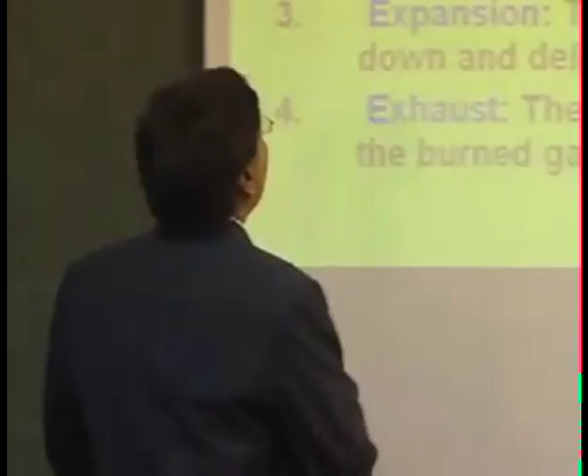Okay. Because we are not giving enough time for the combustion to complete and not getting the equilibrium in the process. But anyway, let's have a quick look at the four-stroke engines that are spark ignition engines. In fact, in India, I don't know how much you know, a policy decision has been taken that we will not produce any more two-stroke engines.

So I would like you to recall the two-stroke engines and four-stroke engines, and within that there are two kinds of engine: one is the spark ignition engine, and one is the compression engine, which can be ignited on its own. Okay. And when we talk about compression ignition internal engines, these are largely the trucks, the buses, the locomotives, the ships and all. Okay, but there are also some large engines which are compression engines but may also be two-stroke, but they are very, very few.

Apart from that, we should at least recall that there are four cycles, okay, four strokes: intake, compression, expansion, and exhaust. Okay. So don't read so much in here, because there's a little figure which we all will recall that's much better and easier to understand. So the first stroke is the intake.

So what you see on the top of this is the intake valve. Okay, the fuel is drawn in, and the piston is moving down. Okay, and this is the outlet or exhaust. You see that is closed here because there is a closing here. Okay. Once this is completely filled with air and fuel, then the compression starts.

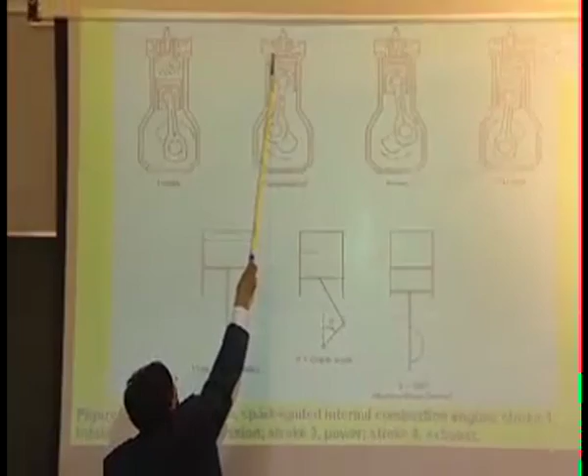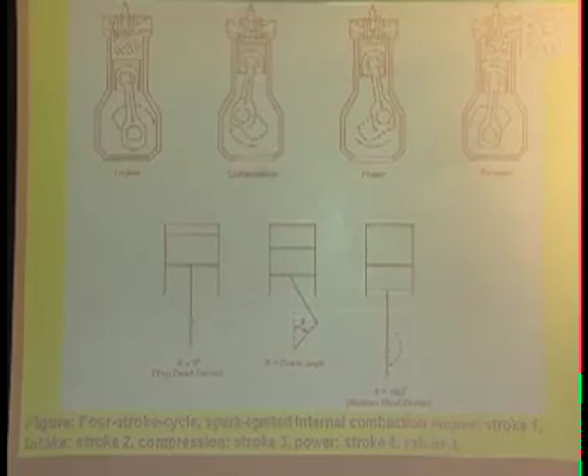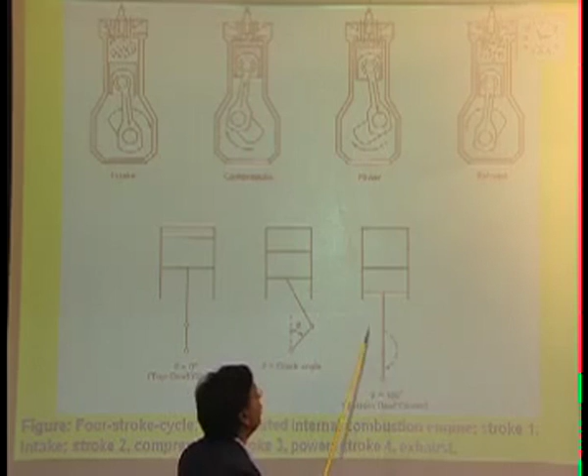So this time the piston is moving up, and both are closed. See here the intake is also closed, and the exhaust is also closed. The little line, you see that one here. Okay, so we get a compression stroke, and then there is a power or expansion stroke. In that case also, both the valves, inlet as well as outlet or exhaust, should be closed.

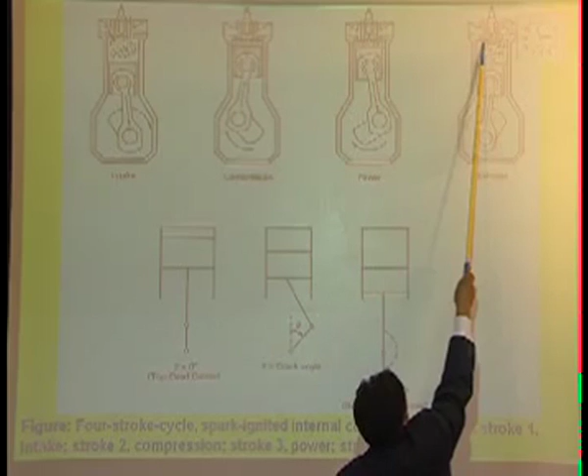So this is closed, and once you have the exhaust, inlet is closed, the exhaust should open and things move out from there. As a result, the cycle goes on, and we continue to get the power stroke. And you can also see this position where theta is 0; theta is the angle, called the crank angle, between the piston rod and the crank rod.

So when it is in this position, this is called top dead center, we all know that, and theta is 0. When it is at the bottom dead center, theta is equal to 180. Okay. In a two-stroke engine, there will be only two strokes, but most of the time now in India we're talking mostly about four-stroke engines. In fact, all scooters you see have been converted to four-stroke engines.

Okay, because we'll probably see in the lecture that four-stroke engines are cleaner than the two-stroke engine. Okay, in two-stroke you get the power very quickly; every second stroke you're getting the power. But compared to four-stroke, the kind of pickup that you had on the scooters that were two-stroke, Priya and all, was much more than the other scooters.

But the technology is changing very rapidly in this case. We don't want to be experts on this one, but still we want to understand a few things. This is the same thing that we described: the top dead center, the bottom dead center, and the crank angle. And sometimes the emissions also depend on the position where the piston is. So we'll pass this on to you, so you don't have to worry about this.

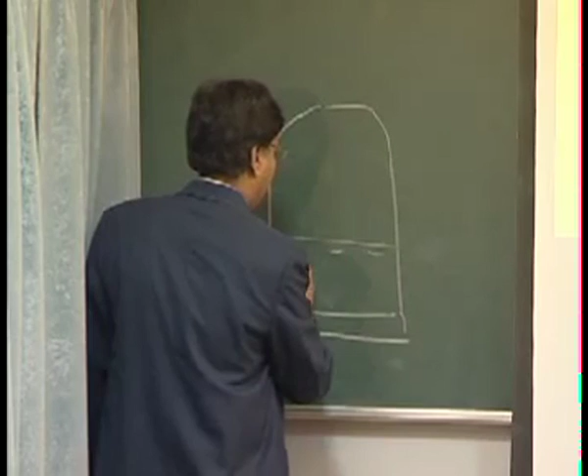In the LPG cylinder it is really liquid inside, and there is vapor above it, so it has a vapor pressure. What you're taking out is the vapor that constantly comes out, and this vapor you are burning. So the pressure is maintained by the liquid, and the pressure is always the same.

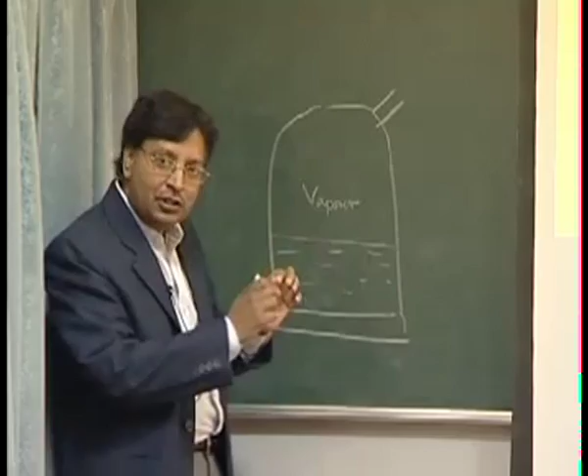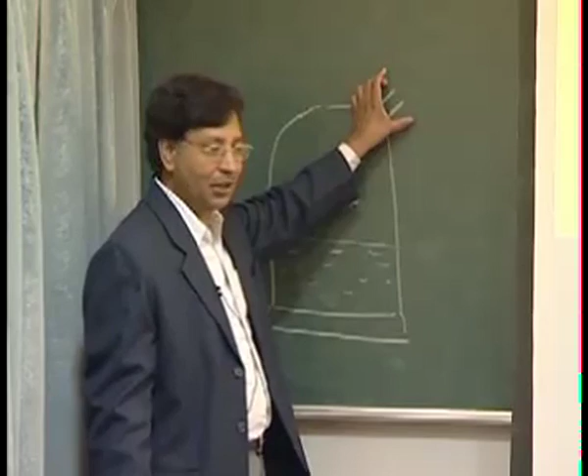So the problem with LPG in the household is you will never know when the cylinder is likely to be emptied unless you put it on a weighing scale. We all know housewives suddenly say, oh, the gas is finished. The gas is finished suddenly because the pressure is always maintained; it is not reduced as the liquid goes down, and then the liquid disappears suddenly.

And how did this very simple mechanism work? It takes the heat from the surrounding environment, and then this becomes vapor phase. That is what you need, the latent heat basically, it takes from the surrounding.

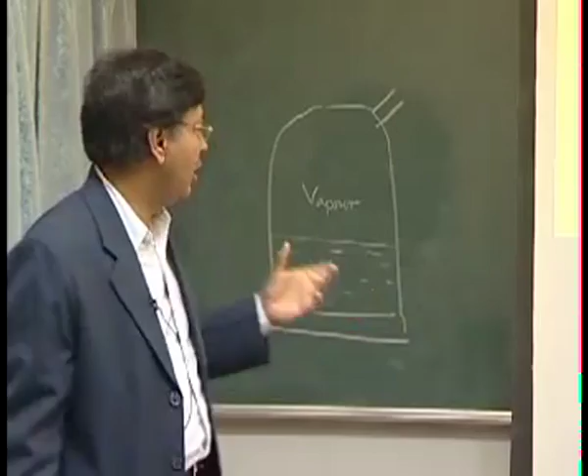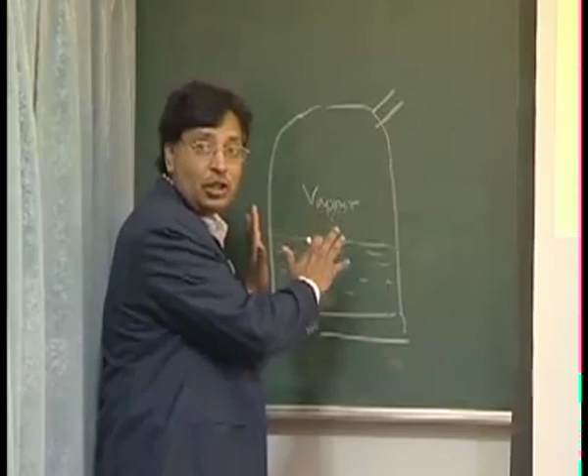Suppose you run into the problem, try this. Suppose your mother or your wife or whoever you are working with, the gas is finished. You might have observed these shopkeepers, like restaurant people, they will not keep it vertical. Of course, you should keep it vertical, but they'll put it upside down.

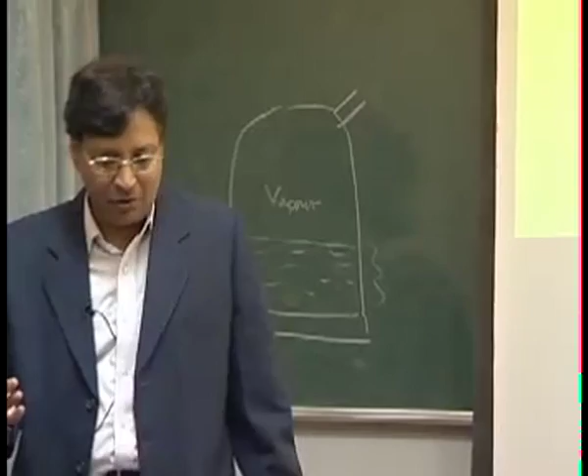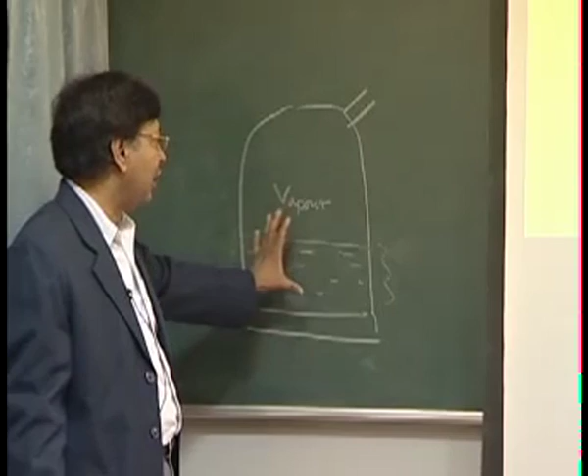In the winter especially, if you can put a little hot water onto this - not a very advisable thing, but in an emergency - you put hot water onto this one, lay it down, and put a little hot water, because hot water you can get from electricity or whatever. You put this in, you might still be able to reuse the remaining little liquid that you have, because that was not able to vaporize - you need a little heat in that area. You lay it down so that the pressure builds up on this side, and then this can vaporize, because this is a liquefied gas, and you can still use it.

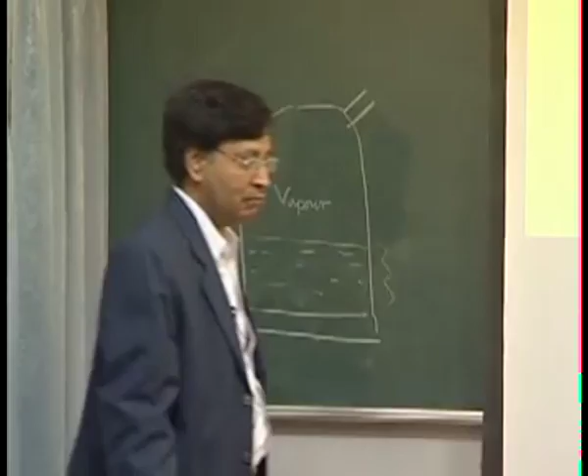So just, or even some people wrap the cylinder in clothes or put a little hot water and things like that, and then your LPG thing will work a little bit longer than what it ordinarily would.

But now people have ways that they can directly, even from the petrol pump, fill propane into their vehicle and things like that.

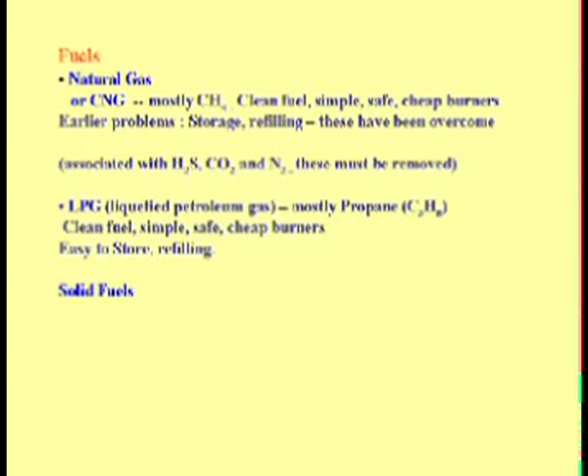Of course, for the other stationary combustion, people do use this one easily. Let's also talk about the solid fuels.

There are coals which may have sulfur content as high as 4%. There are coals from certain seams which may have ash content, especially bituminous coal, as high as 50%. But we still burn them because we need the energy.

So the coal will have many things other than carbon and hydrogen which can burn. Solid fuels will give you lots of emissions of ash, lots of emissions of oxides of nitrogen, and also lots of emissions of sulfur dioxide. So here what you need to see is the carbon, hydrogen, oxygen, nitrogen and sulfur.

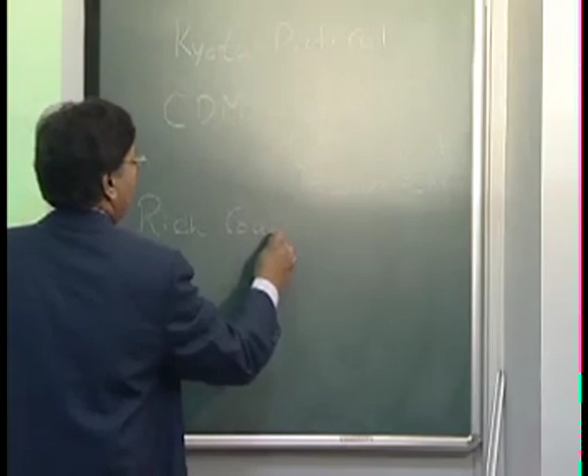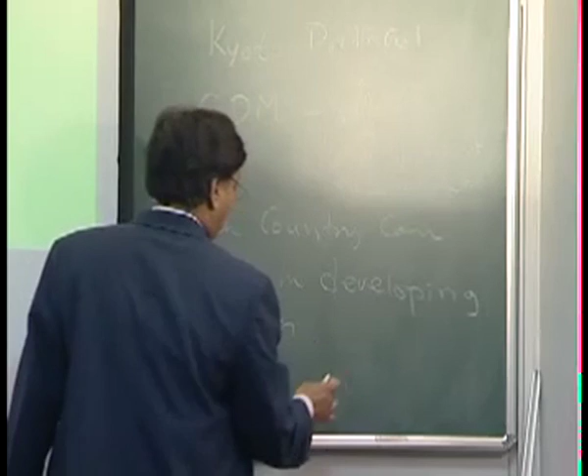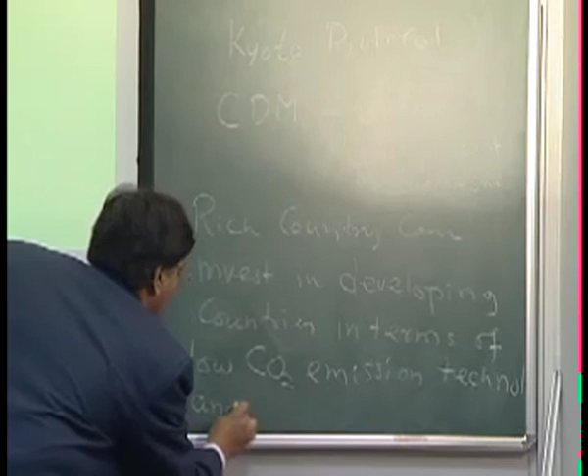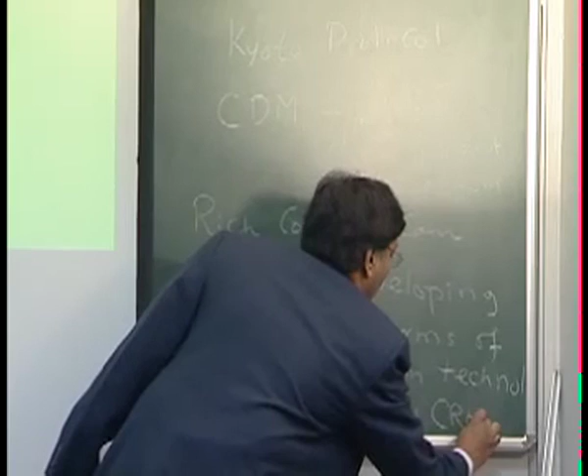One of the techniques is the CDM. In this case, rich countries can invest in developing countries in terms of low CO2 emission technology, and get carbon credit.

The idea is, suppose I have mostly anthracite coal and I'm going to burn most of it. I'm a developing country, I have no choice, I still have to develop. So suppose another country comes forward and says, don't burn this, we'll supply you with better coal that has low carbon. Then the CO2 emission will reduce, but that reduction will go as a credit to the other country. That's called CDM.

So there's a mechanism where, since CO2 is a global issue, wherever you can control it, that's to the advantage. That's what I wanted to tell you about fuel and things like that.

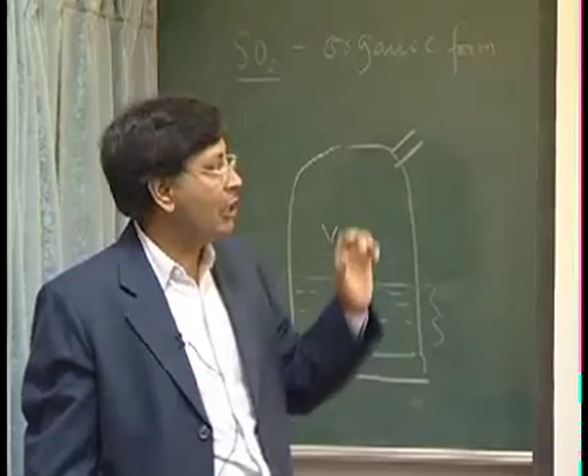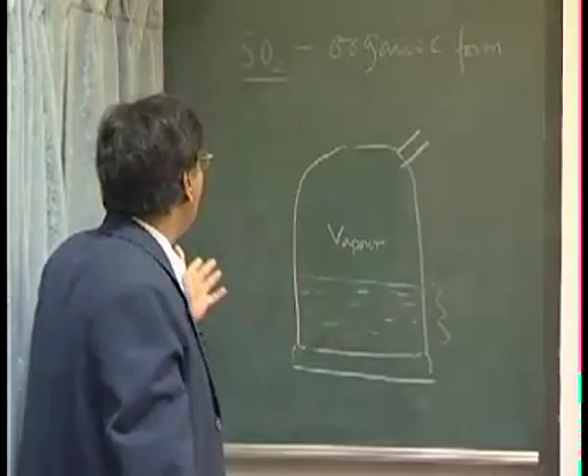Let me also tell you that the SO2 issue, sulfur largely is in organic form, and it can burn even before the carbon burns. So the moment you fire, you might not burn all the carbon, and carbon may appear in your ash, but sulfur will never appear in the ash, because sulfur quickly takes off and burns. That's very important to understand, because sometimes people say sulfur will be in the ash or some sulfur will not burn, but that's not correct.

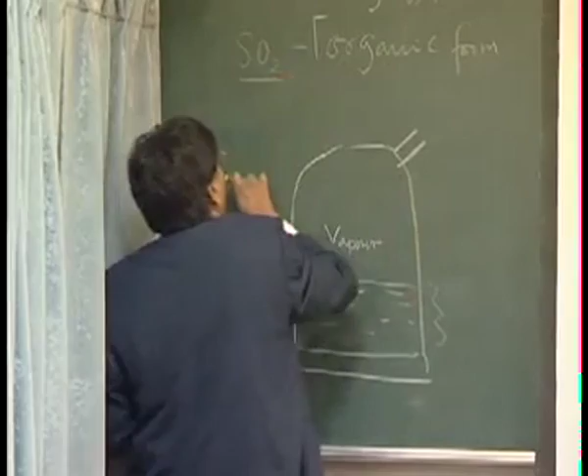So one of the first things to burn is SO2. You should have an idea of the fuels: what is peat, what is lignite, what is wood, and things like that.

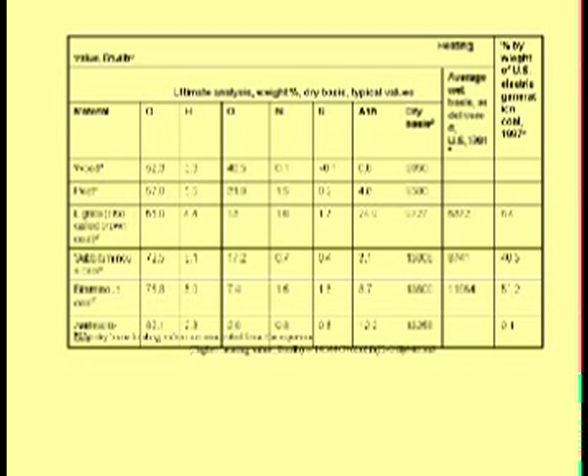The wood has very low ash content. But then again, the energy per ton of coal is more here. It's a bit higher compared to what we burn in India, because in India the ash content will be very, very high.

Are we burning lignite somewhere in India? Yes, the Neyveli Lignite Corporation has a huge power plant based on lignite, and they have other uses for lignite as well.

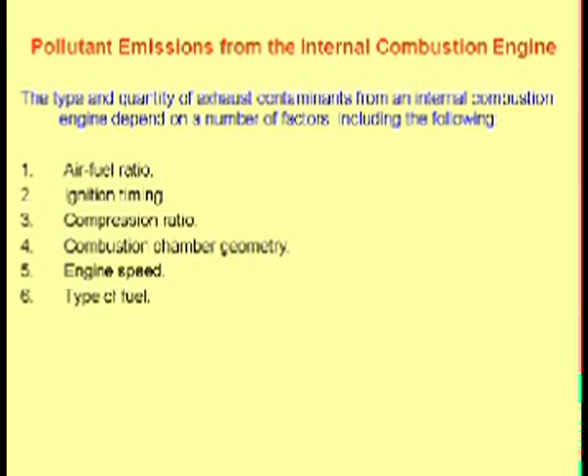Still talking about engines and such, the emission depends on the air-fuel ratio, which we'll examine in detail, ignition timing, compression ratio, combustion chamber geometry, engine speed, and type of fuel. That's where pollutant emission depends on internal combustion. Some of this we'll see and some we won't, depending on how far we want to go.

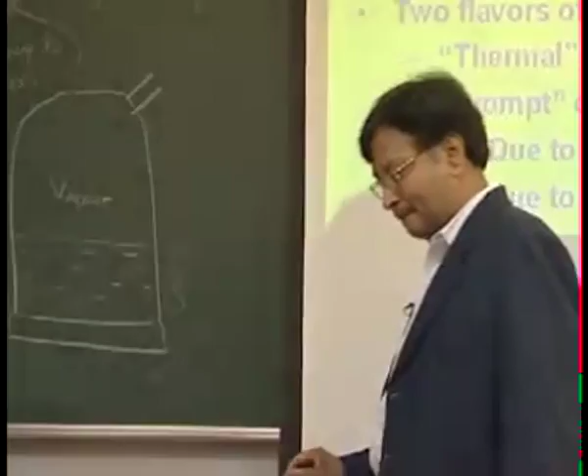Let's see how it happens. Let's talk about nitrogen oxide, a very serious issue. Let me also define phi, the equivalence ratio, which we defined last time: fuel-air ratio actual divided by fuel-air ratio stoichiometric.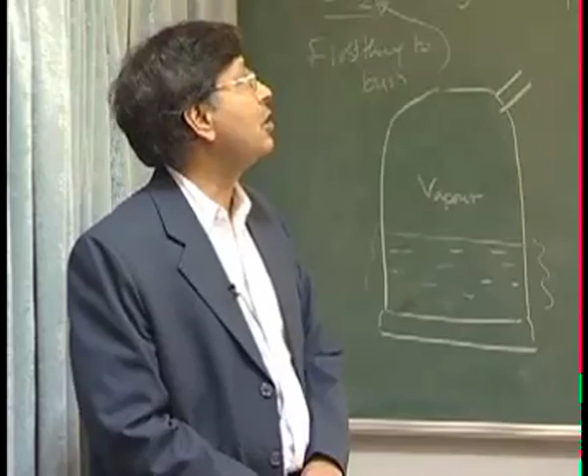So is that the same thing, the equivalence ratio? Now quickly tell me, if the equivalence ratio is less than 1, am I on the leaner side or the richer side? Leaner side, okay. If that's the case, let's look at this one.

So we have defined phi. Now when people look at the actual data and try to reason this out, when is the peak NO? Because NO is only formed...

This happens when it's slightly on the lean side of stoichiometry, when phi is close to 0.9. If it's on the leaner side, you see the NO peak is not exactly at stoichiometry, but somewhere here, because of the oxygen surplus.

We can continue - since we're talking about excess oxygen, it doesn't necessarily mean NO levels will continue to rise as you increase it. Why? Because you also need certain temperatures. NO formation is very sensitive to temperature, because it needs high activation energy.

So as you go too far to the leaner side, since you're not supplying enough fuel, the temperature will drop. When temperature drops, NO will not form, although you may have lots of oxygen, because moving to this side gives you more and more excess oxygen. But there are two combinations required: you need the excess air, but also the high temperature, as we discussed.

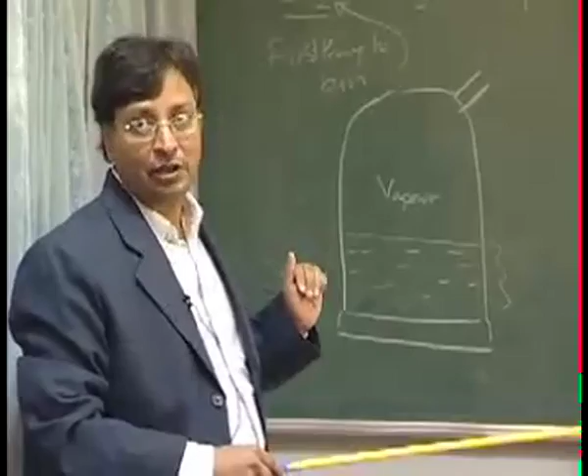So when you want to manage these things, you can either control the oxygen or control the temperature. We'll see that maybe today or in the next class.

Now there's a terminology here, very quickly - you see 'prompt NO.' We'll look at that in a moment. Prompt NO is the NO which is formed first, before you can think of anything else happening. This method with thermal NO was devised by Zeldovich, so that's sometimes called Zeldovich NO. Prompt NO was identified by Fenimore.

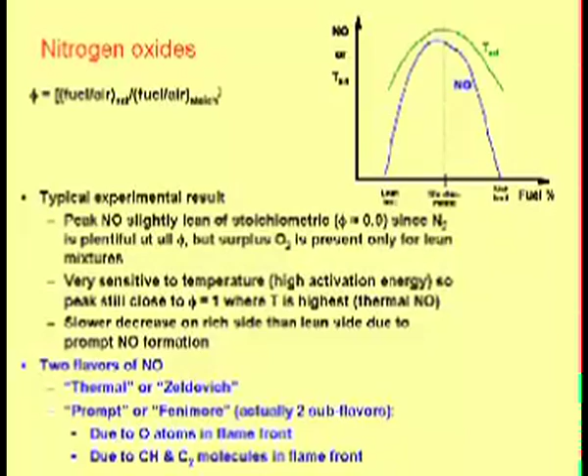It could be due to oxygen atoms in the flame front, or due to carbon and hydrocarbons and C2 molecules in the flame front. So before even the nitrogen and oxygen of the atmosphere can react, this can occur - even hydrocarbons can react to some extent with nitrogen and produce nitrogen oxide. Earlier we were just talking about N and O, but here that is one route.

So the one route is, if you have the O, this can be quickly formed because the activation energy requirement for this is... this is the slow process - activation requirement is high. But if it can react with this, it can form NO, and this reaction is much faster.

Zeldovich NO occurs in the burnt gases, because once excess everything has happened - this reaction of O plus N2 is slow - it occurs in the burnt gases downstream of the flame front, not in the flame front itself. But this doesn't tell the whole story, because something else occurs right in the flame. Experiments show that some NO forms inside the flame - that is called prompt NO, and it may not depend on temperature or on nitrogen in the fuel.

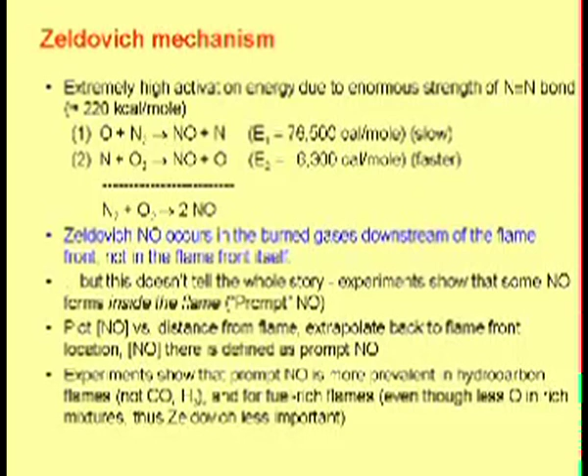We'll show you a plot of NO versus distance from the flame, extrapolated back to the flame front location to define this. Experiments show that prompt NO is more prevalent in hydrocarbon flames, and for fuel-rich flames - even though there's less oxygen in a rich fuel mixture. In this situation, for prompt NO, temperature isn't very important, but the reactions that may occur are.

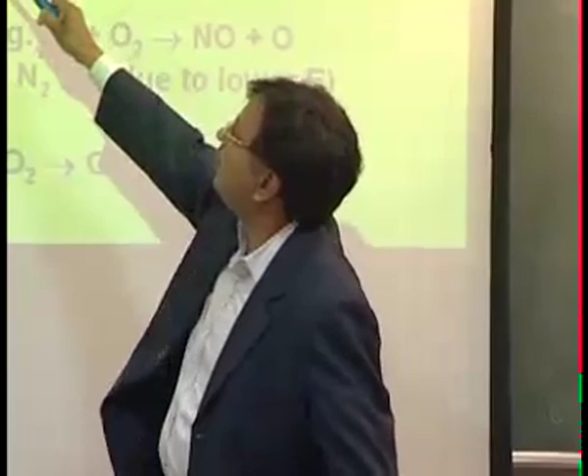When people plotted this, they found there was a quick NO level that then stabilized - that was more due to thermal NO as we moved away from the flame. So the point I'm trying to make is that for this formation, it doesn't even need excess air or not - that oxygen which you're supplying even for combustion, a small part of it might just be taken by the nitrogen there.

And how it happens is that you have some hydrocarbons - there are two possible routes, and people are still discussing how it happens - that this hydrocarbon can react with nitrogen along with the air, and it can make atomic nitrogen. This atomic nitrogen can then react with oxygen - and recall from the last slide, was this reaction faster or slower?

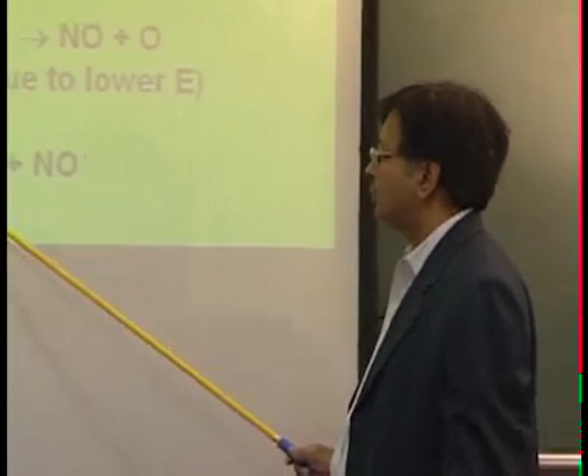Faster. Much faster. Okay, so this reaction can happen and you can get some NO, because this is much faster than the route from N2 plus O. Or some people also say that some carbon may be available for the nitrogen to form CN, followed by CN reacting with the oxygen to give CO and NO. So this also can happen.

So you can see, although you may have lots of oxygen, you may still produce CO in that process. But the most likely process is this one, that you get the prompt NOx. There's not much you can do about the prompt NOx, because this happens right in the flame. People are looking at ways and means to control the prompt NO, but again it is not a very significant amount. It could be as low as 2%, 3%, 4%,

that sort of thing. So the new thing that you learned is the prompt NO, and that is formed because of the reaction between the hydrocarbon and nitrogen before the hydrocarbon can be taken up by the oxygen. That may produce atomic nitrogen, and that can very quickly react with the oxygen before this oxygen can even take on to hydrocarbons. So that's what is called the prompt NO.

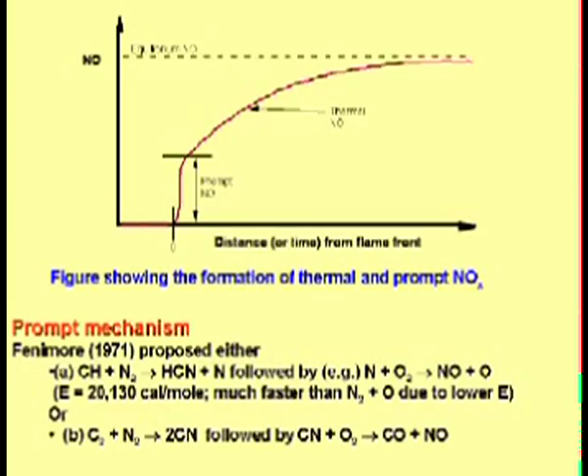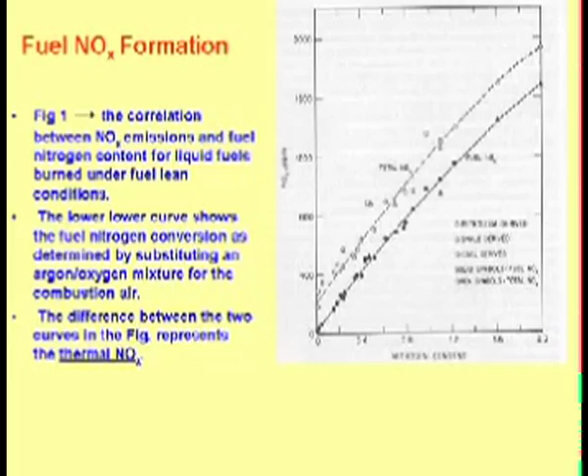thermal NOx. And that is what you can probably control or try to minimize, as opposed to the NOx that may come from the fuel. You can also see this is somewhat higher than the coal you see here. The corresponding value should be somewhere here, because they all have one-to-one correspondence. And then you see the coal. Coal is in fact a very significant source of oxides of nitrogen. So this gives you an idea of how people could figure out which part was which NOx.

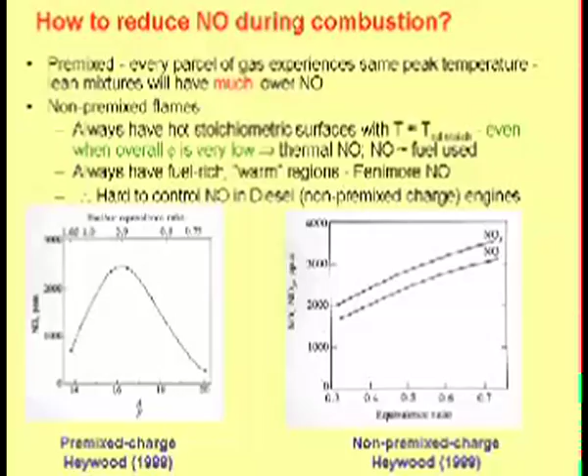Let's talk about the unburnt hydrocarbons. We are not talking about the control, we will talk control in the next class. In the engine, emissions of the unburnt hydrocarbon come from the raw unburnt fuel, because some fuel can escape unburnt, and fuel that did not burn all the way to CO2 and H2O. Some might just escape as such. Some might be converted into something else but stay as hydrocarbon and did not burn.

Because you start with some hydrocarbon, then there is the intermediate oxidation of the fuel that can take place. So you started with, let's say, methane. Some may burn directly and some may convert into something else. Some might just go as unburnt, and you may find this could not burn in the process and was never in there, but this might also be seen at the exhaust. So that is the difference between raw unburnt and fuel that did not burn all the way to CO2 and water. Lubricating oil is a serious problem.

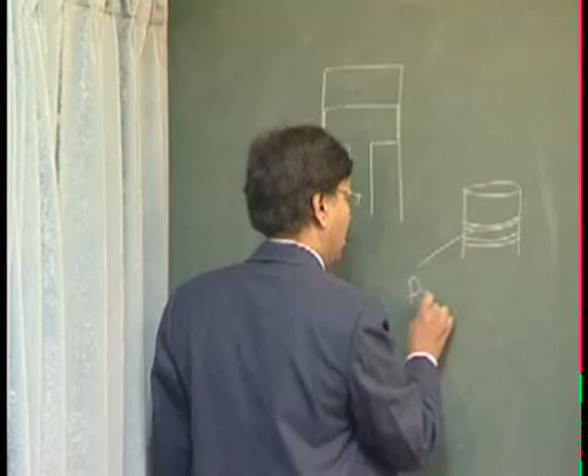What is the role of piston rings? To keep it tight. They are a little flexible, they can press, and then they expand themselves so that it becomes a little fixed. Okay, what happens when you have the piston rings here?

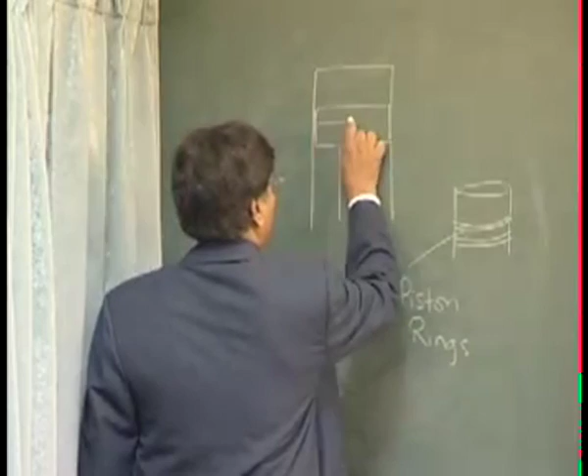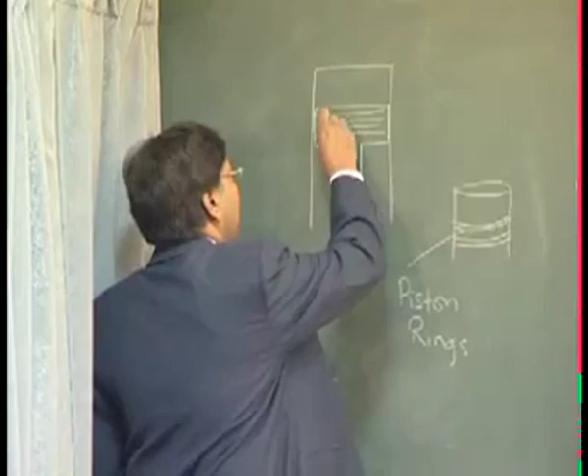As the engine gets old, there is wear and tear of everything. Of course, there are two metal parts hitting each other all the time. So this thing is worn out, and the piston rings are also worn out. So as a result, when you have the expansion stroke or power stroke, there is huge pressure here.

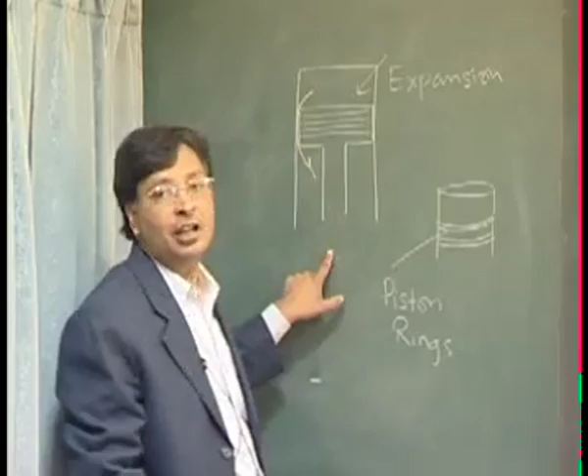Because this pressure is very high here and because of the wear and tear, this hydrocarbon, even before it burns or partially burned, can come out from the space here into the crankcase. This can also come from the side. And obviously once this comes out, there is no way that you can burn it. So this is called the crankcase emissions, or more popularly known as

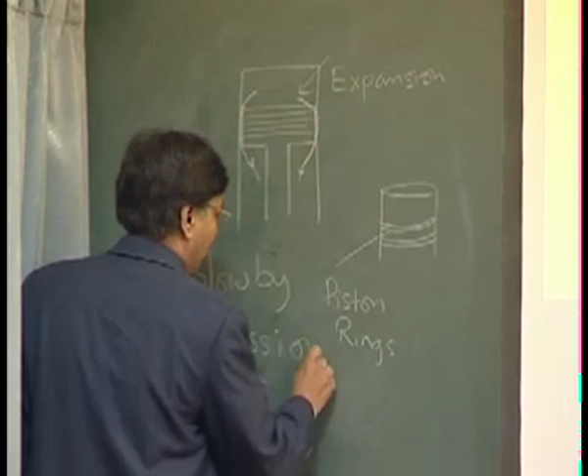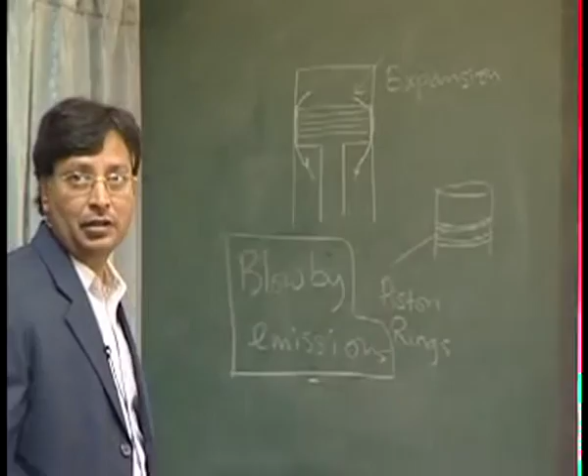blow-by emissions. Combustion engineers or IC engine people will be experts on everything, but we need to know at the air pollution level what these emissions are and why the crankcase emissions can be of huge significance. Maybe we'll talk about the control in the next class, but most of the control they do is that the blow-by emissions are recaptured and recycled in the car itself.

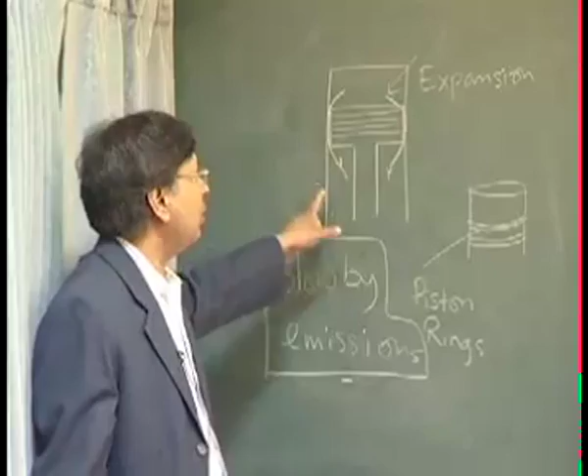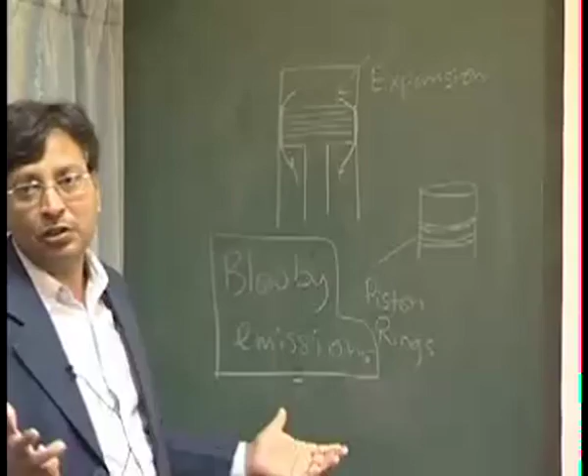But at least now you know this is what we are referring to: the crankcase fumes, older engines without crankcase gas recycling. If you can recycle these emissions back in there, you are more or less handling the situation. But if you don't, then these emissions used to occur. So therefore for the old engine, you must get the engine done well; maintenance is very important.

And sometimes the old engines can go so bad that there's a government regulation that engines more than 15 years old should go out of business, because these emissions can become very significant. And these will be all hydrocarbon emissions. You can also see the fuel tank emission. Maybe we'll talk a little later about the fuel tank.

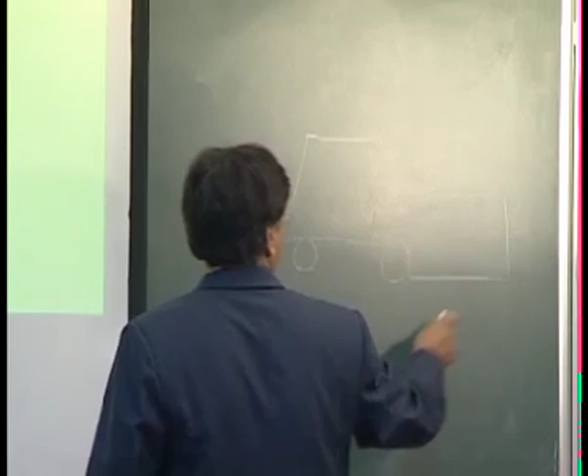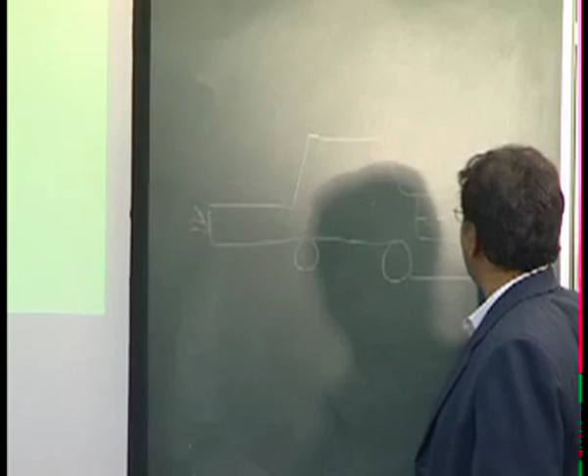If you have the car, well, I don't know how good or bad the car looks. Let's say this is the front. You have the light on this side, and then you have the fuel tank here. When you fill it, the petrol is up to here. As you are filling, the pressure here builds up, and then there are leakages from here. So this is called the evaporation losses in the tank.

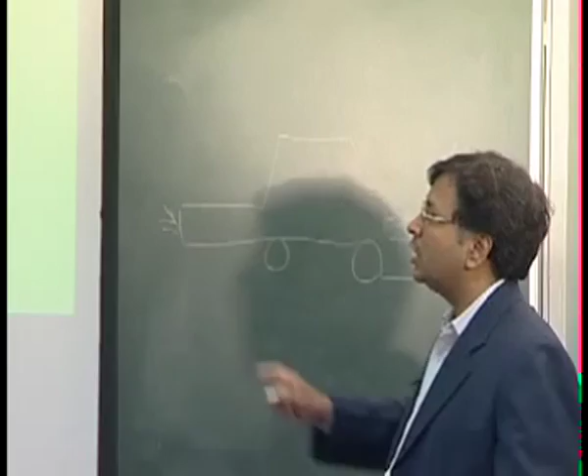And this can occur all the time. It's not only when you are filling it up; that time it is more because you have opened it, and that is when the emissions are more. But this occurs all the time. There will be some leakages, and even if there are no leakages, in a petrol vehicle the fuel is pumped through the fuel pump and taken to the carburetor. Of course, new technologies have changed, but the old ones have a carburetor.

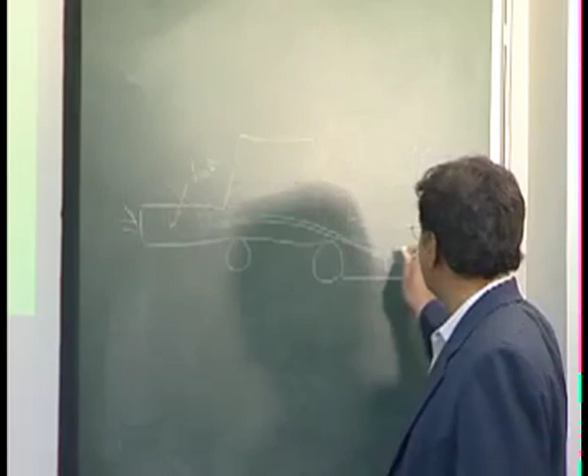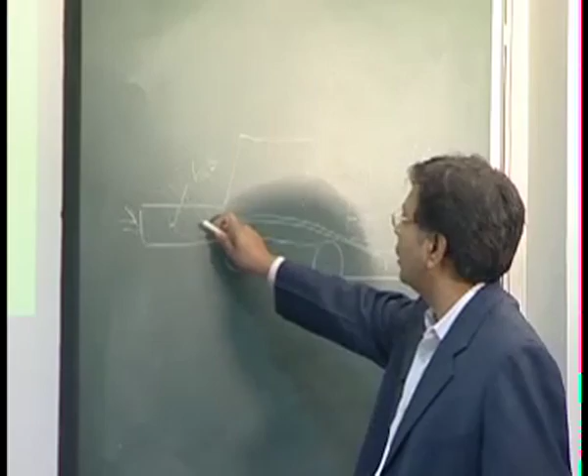So some people used to say, with the earlier scooter, the moment you get off the scooter, switch this off, so that at least this doesn't go anywhere. But now, probably we'll see in the next class, they are able to recapture these vapors and put them back in there, so that you can completely recycle. We'll probably see a line diagram, because you should have an idea what the latest thing people are doing is.

And I don't know if you notice this, that as you are driving, your car is showing the empty kind of thing.

Okay, and then we're all right. You stopped somewhere for half an hour, 1 hour, and this thing slightly going back, as if you have more petrol in your car. Okay, this is all captured by your evaporation system.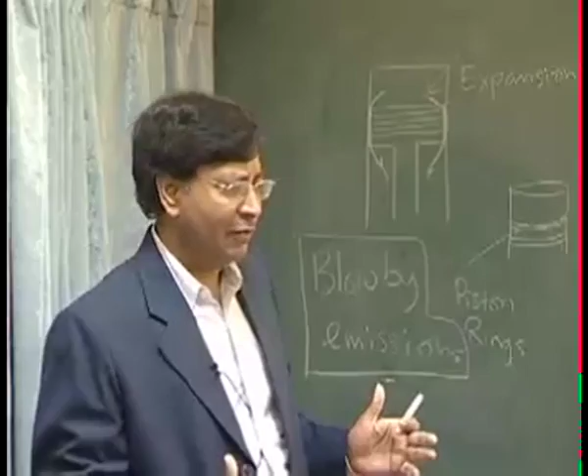It is very complicated. The amount of research and development that has gone in the car, I think there's no other machine where the changes of the technology have so many efforts, from the comfort to the combustion to the air conditioning and to the heating, and the adjustment of the seats. Sometimes in the seat there are 4 or 5 motors so you can adjust your back, everything you can do there. So everything is there.

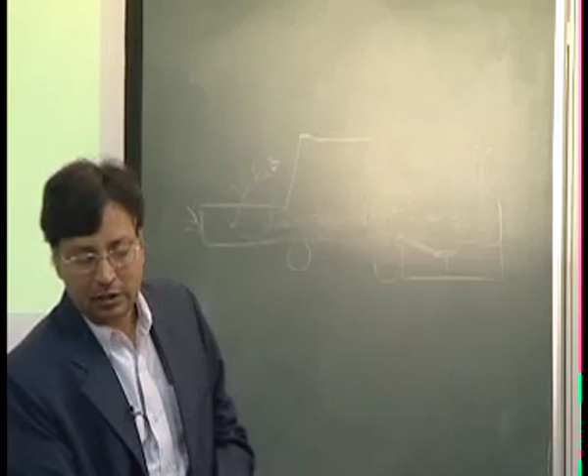So otherwise, if these things weren't there, they would also have very significant emissions. And filling stations, of course, sometimes have to have a system that can capture emissions at the filling stations. So you see the sources of hydrocarbon. Okay, all right. Well, we will do this one.

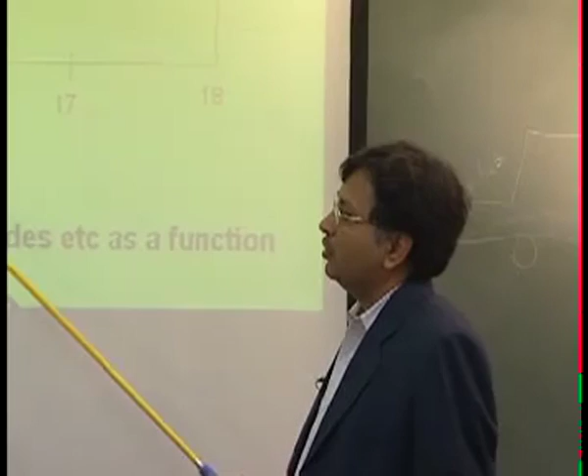And you really need to put some attention here because this is a very interesting and useful figure. What I'm doing is running the engine and seeing what is happening in the exhaust for the different conditions of the air to fuel ratio, and looking at the 3 important things: carbon monoxide, hydrocarbon and NOx, and their concentrations can look very, very different.

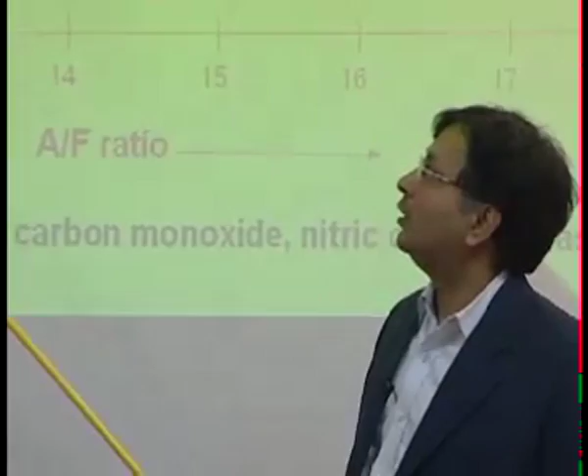And be careful about the units. CO is in percentage, hydrocarbon is in ppm, it can even be more, and the NOx is again in ppm. So let's see. Thanks to Bara, he has put this animation into this one. So for example, our stoichiometry is here. I put my engine on, and then you see the CO.

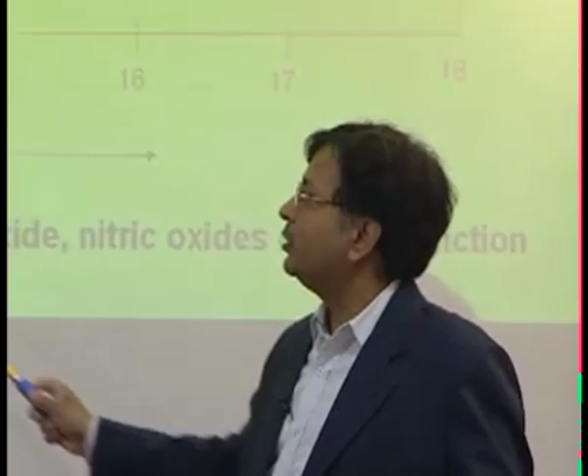So in this region I'm not putting enough oxygen. I'll have lots of CO, which can be of the order of 5% or so. We have measured CO; sometimes we have found CO in an old Ambassador car of the 70s up to 8%. And as you supply more and more oxygen, almost up to stoichiometry, you see the emissions are going down. Fair enough, simple thing, but the CO emissions will reduce depending on where you are.

Look at the hydrocarbon. Now we are in measurements of ppm. Again, you are putting more and more air. Hydrocarbon is reducing because you are able to burn more and more hydrocarbon, but it does not really go very low like CO, because, as we said, it can vaporize before it can burn, something like blow by, so the emissions continue to happen. It may reduce to a minimum at this point, but it doesn't go so low. And then there's a little tendency here that it may go up. Why?

Because now there's not enough fuel, it's not able to burn, so chances of unburned fuel escaping become larger and larger, because you don't have enough to burn. In fact, if you go so high, above 20 or so, you may not even be able to fire, because you have made your mixture very, very lean. If you have made it very lean, then hydrocarbon might just escape, because you are not even able to burn.

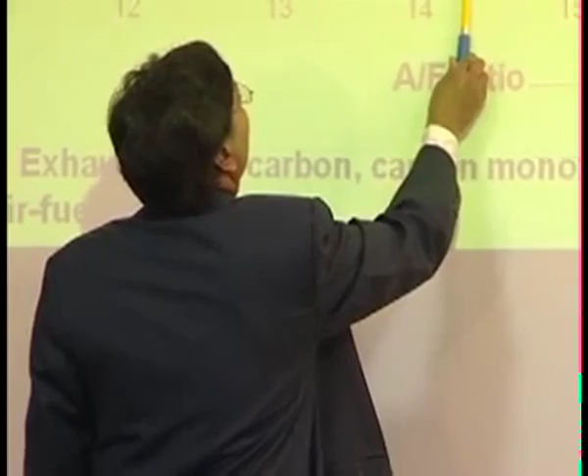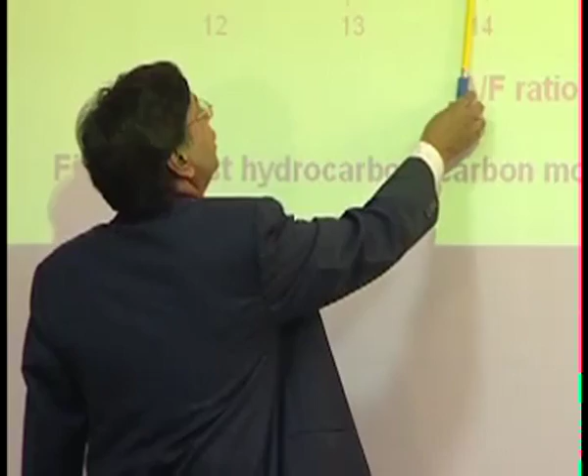Before we go to the next slide, normally my petrol vehicles operate somewhere close to here. It means I'm really supplying less oxygen, because you want the good pickup. So if I ask you, what are the issues with the petrol engines? Your answer will be carbon monoxide and hydrocarbons, not so much of NOx. You agree or you disagree?

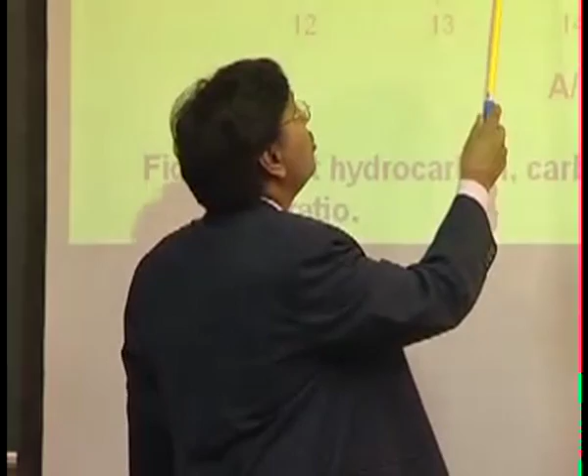Sorry, carbon monoxide. If you come this side, somewhere here, see, the carbon monoxide is in percentage, so it's not small, 1.52%. The units are in percentage. Let's see the issue in the relative sense. If I am operating my engine somewhere here, then I am likely to get huge amount of hydrocarbon, huge amount of CO, in the relative sense, not so much of NO. So look at how the two engines will give you different emissions.

As I operate on the diesel side somewhere here, I get lots of power, lots of energy. I can drive huge trucks and locomotives. But here, maybe hydrocarbon is not so much a problem. CO, in a diesel truck you go and measure, you will not get any CO. But what will you get? Huge NOx. NOx is a serious problem with the diesel engine. And the other thing is the smoke from the diesel engine, which we'll talk about maybe in the next class.

But you can see how, with this little knowledge of stoichiometry, we can deal properly with the petrol-driven vehicles and the diesel-driven vehicles. We can set the standards. If for the petrol-driven vehicles you set the standard that NOx should be less than this, well, where is the problem? They'll all be happy. But then you have to set the standard for CO and hydrocarbon for the petrol vehicles.

In fact, if you see the regulations, the so-called Euro 1, Euro 2, Bharat 1, Bharat 2, Bharat 3, for the petrol-driven vehicles they'll focus on CO and hydrocarbon. For Bharat 2, 3 for the diesel-driven vehicles, you will see it will largely be about the smoke, because diesel produces smoke, which we have not discussed in class, and huge amount of NOx.

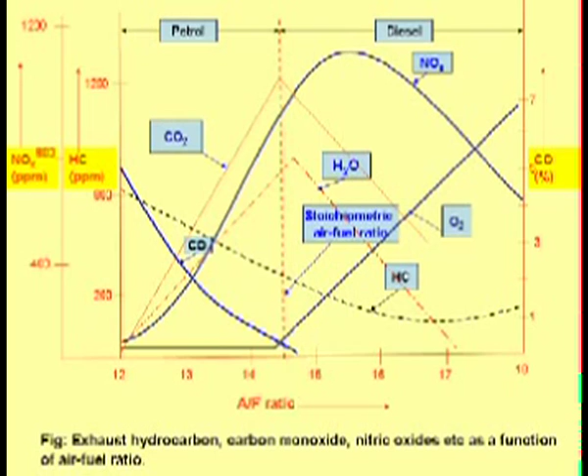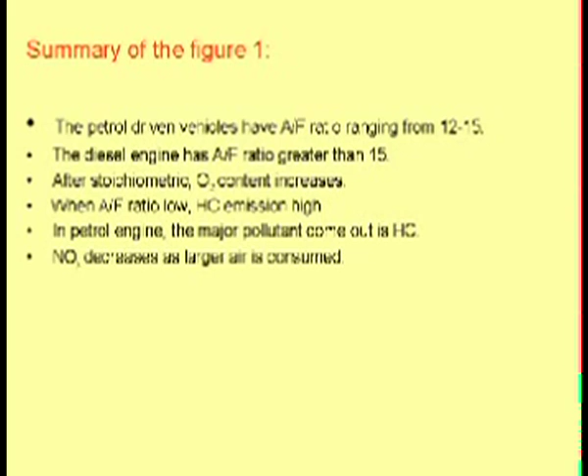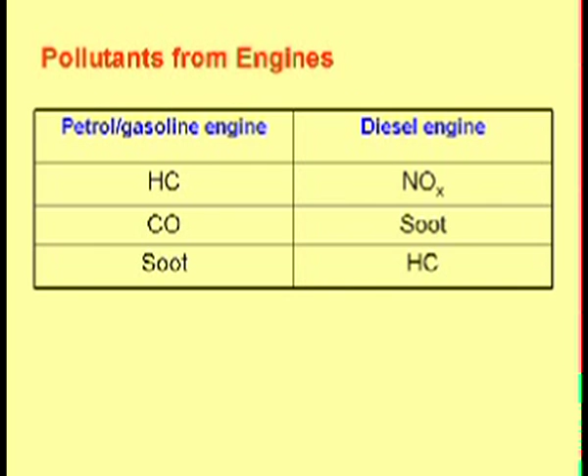Something more? Oh, that was the question here. Diesel, and then summary of figure 1. Well, we got it wrong here. This is also not so much hydrocarbon, comparatively. NOx is high, soot is high. The soot is low here, and hydrocarbon is low here. Sometimes hydrocarbon can be more in the diesel engine because you try to push more and more fuel, which cannot even burn, and that can come out. We'll stop here.